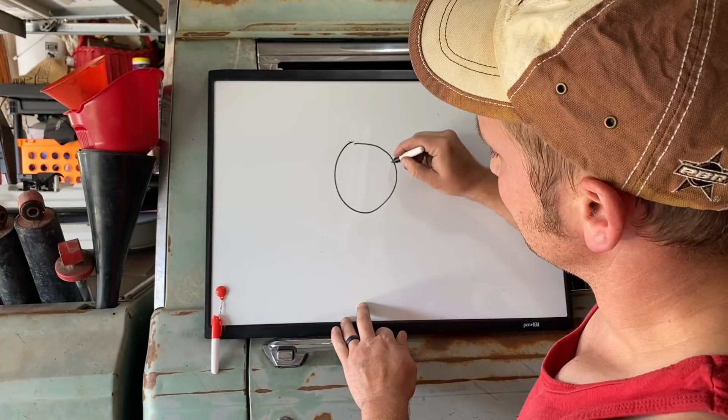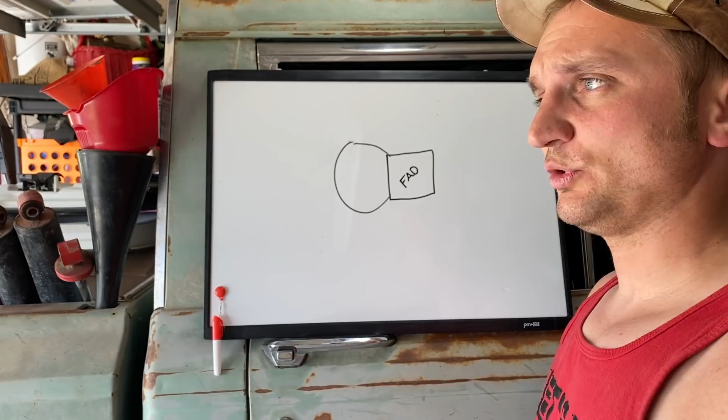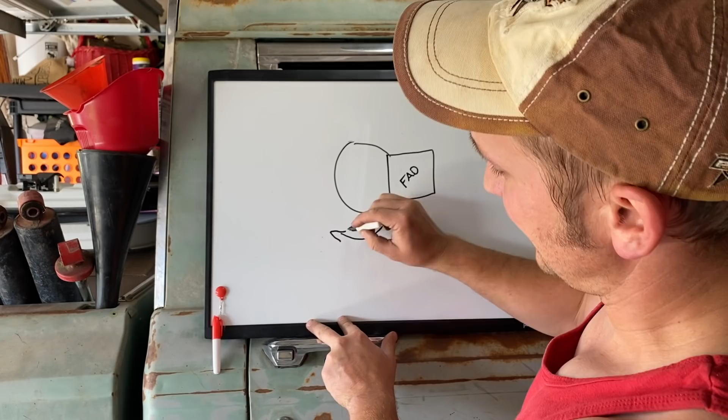Just to give you a visual representation of what I'm trying to articulate here: you have your axle tube, and you have the FAD motor coming off the side of the axle tube. As you lift the Jeep, a lot of people push their caster out to a higher degree to give a smoother ride. So when you add caster after lifting your Jeep, you're essentially rotating the bottom of the axle out forward, which leads to the top coming back.

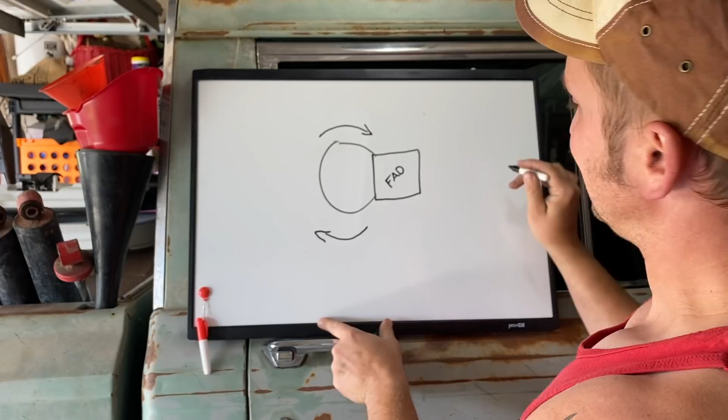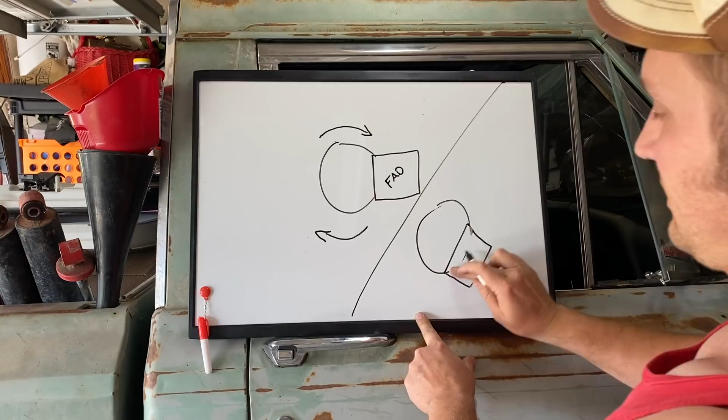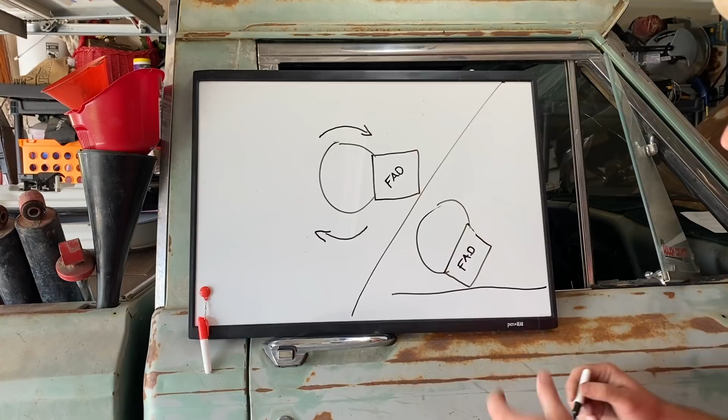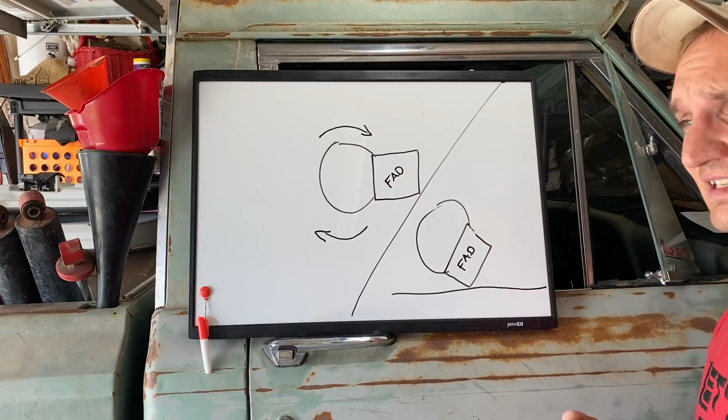So what that effectively does - you have your axle tube, and as you rotate it, your motor is going to start coming off the back. And of course, that's going to become a new low point on your axle, or maybe not your new low point, but another low point to be getting hit on rocks. Since this isn't designed to take hits on rocks, one, it's going to get you hung up. Two, if it cracks, you're going to start leaking oil. You don't want to lose oil in your front diff - that can be extremely problematic, operating a differential without oil.

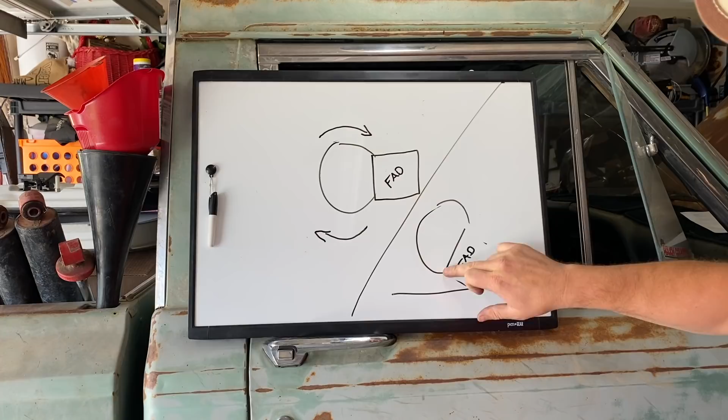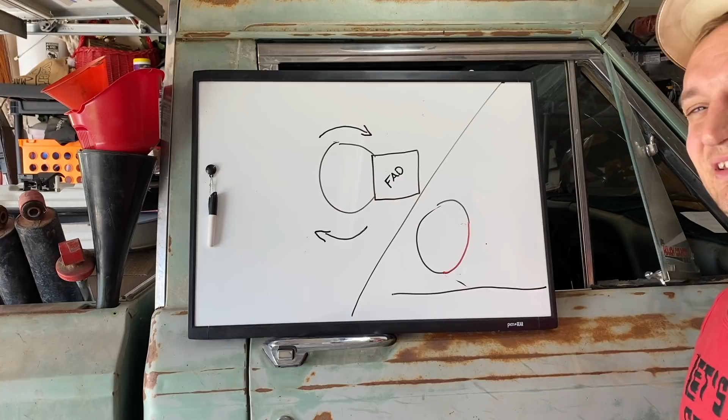So one of the purposes of this is, since I'll be deleting the FAD, not only will I be losing that low point, it also makes a couple bolts easier to get to underneath. Do you need to do this? No, of course not. Your Jeep's going to operate just fine with the FAD motor. But if you go to a solid axle up front, there's no point of having it.

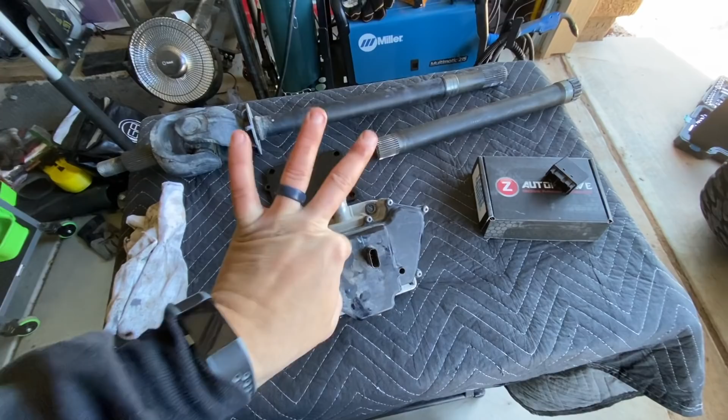We're about to get into all the install and all the different parts in order to do this delete. Stay tuned. All right, so deleting the FAD actually takes 3 different steps in order to fully delete. I've already done 2. This is finally going to be the last step in deleting the FAD.

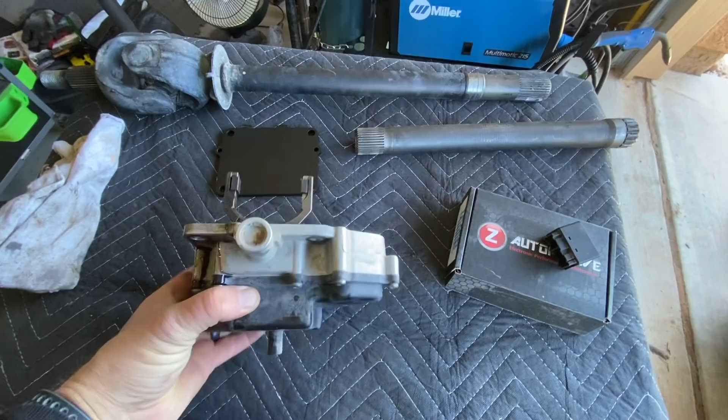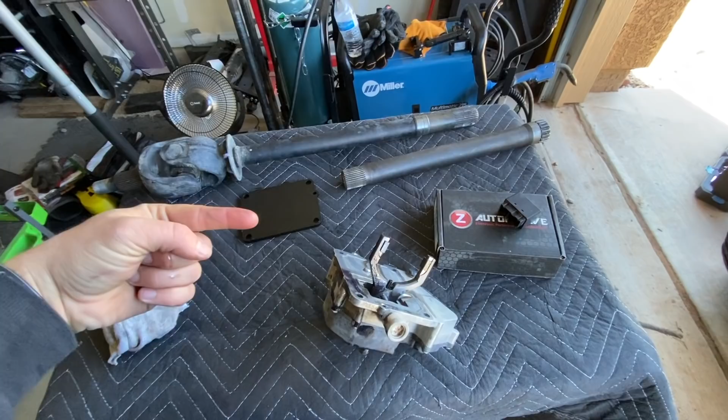Now, the FAD is what they call a front axle disconnect. It's this little actuator motor that attaches to your front axle on the passenger side. The idea of the FAD is to disengage the front axle, so when you're rolling down the road, the front axle and diff aren't also rotating, which prolongs the life of your front axle because it will not rotate while it's driving.

I apologize for the background noise. Neighbor is pouring concrete today.

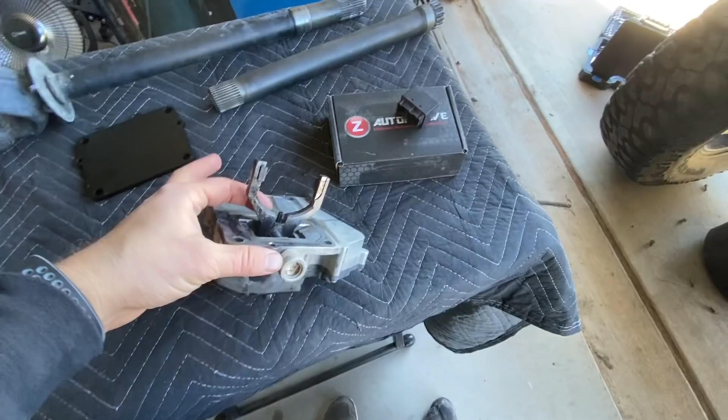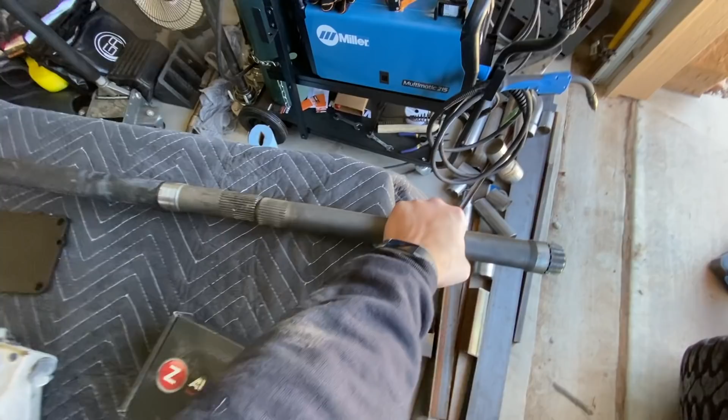How it works is this motor has a ring around it - sorry, I've lost the ring, a really big thick washer that fits around this. This will rotate left and right to engage and disengage your axle. This is actually my old axle, and it would look like this. It was a total of 2 pieces just for the passenger side. The FAD would sit directly in the middle where these 2 pieces combined, and it would slide - that fork would slide over and slide the coupler. It was just a very large ring around both, and it would connect and function as one piece, rotating together.

When you took it out of 4 and went back into 2 high, it would disengage and you wouldn't be spinning the front axle. The reason they do this is it saves a little in gas mileage, and it's cheaper for them to mass produce, I'm sure. Personally, I would have loved to see Jeep put locking hubs on the Rubicon models, because that would have been badass, and I wouldn't have had to do any of this. This is much cheaper for them to do, and of course it's all automatic - locking hubs you have to jump out and turn on and off, and Jeep was really just pushing to dummy-proof this Jeep as much as possible.

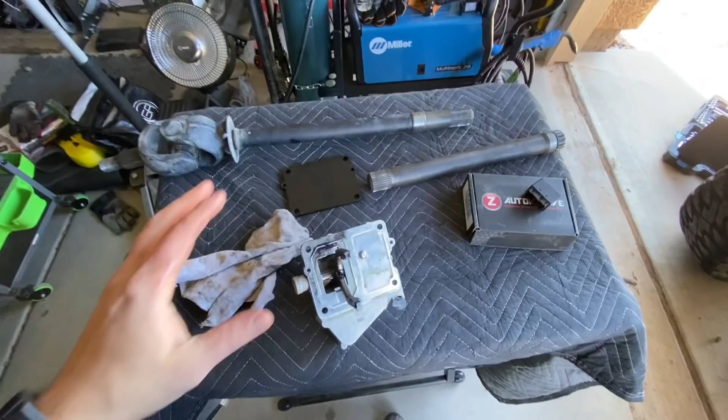So getting back into all the different steps you're going to need for a FAD delete: one, you're going to have to replace your 2-piece axle with a solid 1-piece. So the first step in doing the FAD delete is replacing the axle shaft. This is the most important part of doing it, because if you start deleting this and you still have a 2-piece axle in there, you're going to have issues.

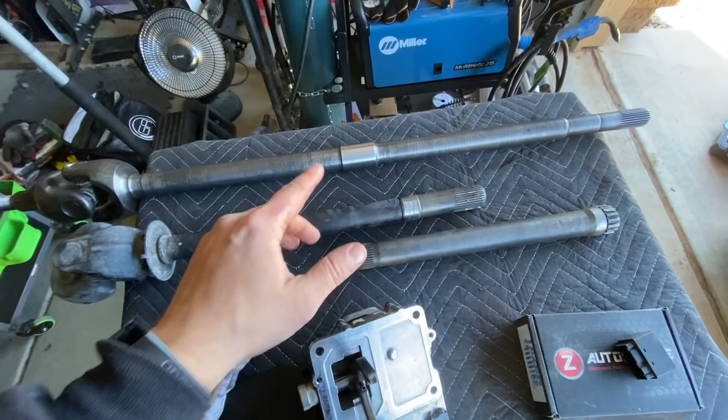Now, I've already replaced my axle with the RCVs, and I did that about a year ago. I'll put the link to that video here, so you can go back and watch how to do that. The second thing you're going to need - once you replace the axle shaft, this still works as normal. You won't have any issues, you won't have any dummy lights or anything. It will continue to function as if there is no problem. You'll be fine.

Now, if you remove this—I have read online, I have not personally seen it, but removing the FAD while the electrical system, which is what the Tazer is for, still thinks the FAD is there, you will have issues going into four-wheel drive.

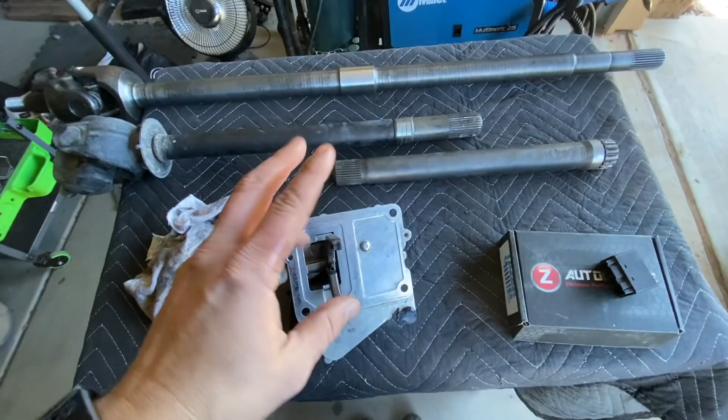Now, the second step is what you're going to need, is you're going to need the Tazer. What the Tazer will allow you to do is go into the settings and completely delete the electronic system for the FAD, and you won't have to worry about it. I'll put a link to that video here.

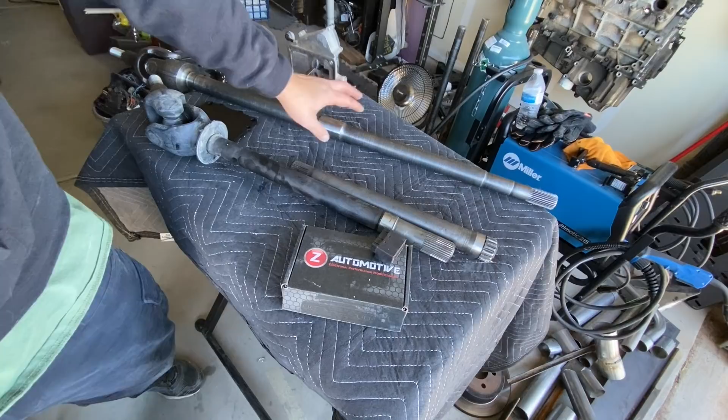The last thing you're going to need to do, once you deleted the electrical system and once you replace the axle shaft with a one piece, you can finally remove this guy. However, if you take this off by itself, you're going to have a giant hole in your front axle. You don't need that. So that's where this last piece comes in.

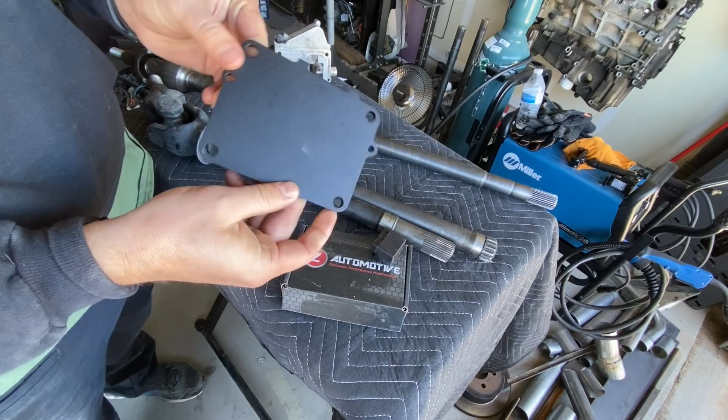Now, this is a delete plate. Nothing too fancy about it. I will be losing all this extra real estate off of the back of my axle. And of course, it sits a little lower, just kind of how my axle is positioned right now. So I got more caster, it starts to get rotated down that much more.

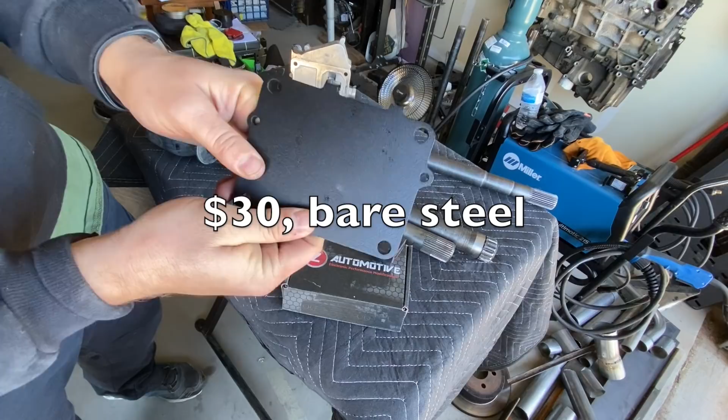So this piece I got from CADFAB, relatively cheap for what it is. Yes, you can make your own plate. Quite honestly, I didn't see the point of doing it because it's already been designed, cut, and ready to rock and roll. So removals are going to be pretty simple.

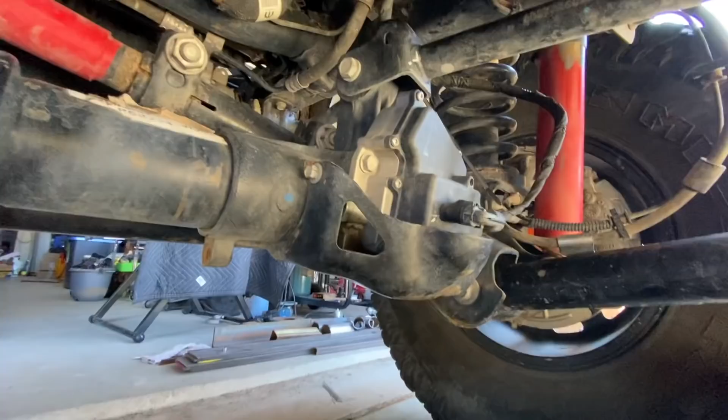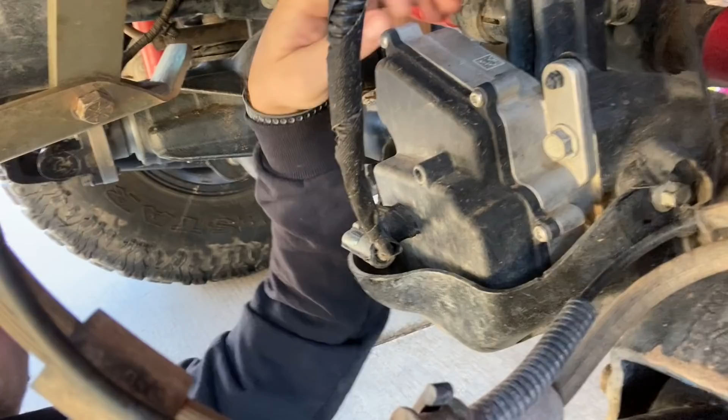First thing we're going to do is remove the skid plate, and then we'll be able to access the actual FAD actuator. To do that, you're going to need a 10 mil socket. There's going to be 1, 2, 3, and the fourth one is back here. For some reason I got tape on mine, but right there. You'll need a thin socket for this one.

Next step is going to be removing the plug. There's typically a white clip in here. I broke mine—I break my stuff a lot—but unplug it. Get that out of the way.

Then we're going to be removing this guy, this guy, this guy, this guy. Just at this point, be prepared to catch oil, because it is likely once you take off the actuator, you're going to get some oil leakage. Get yourself an oil pan to avoid making messes.

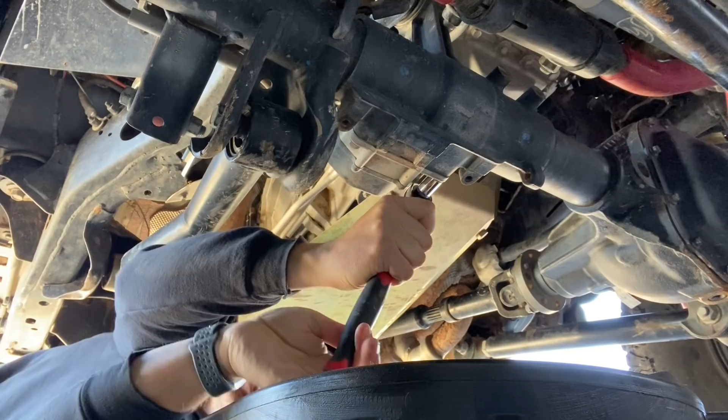Get yourself a 13—and is that a 13? I grabbed a 15. Weird. Does look like a 13. Yes. Whoop, see the oil leak? Yep. After removing those 4 bolts, it pulls right out.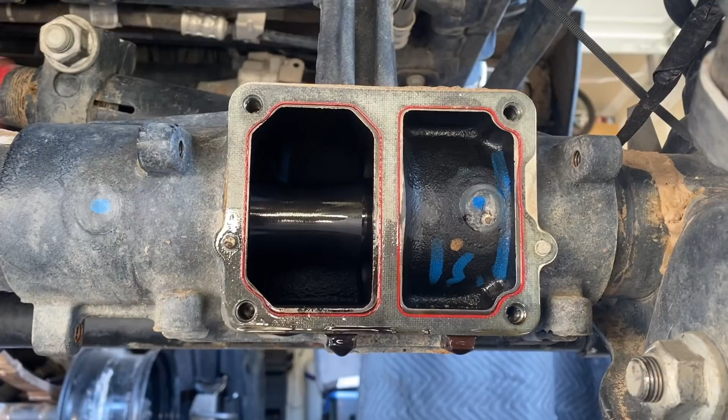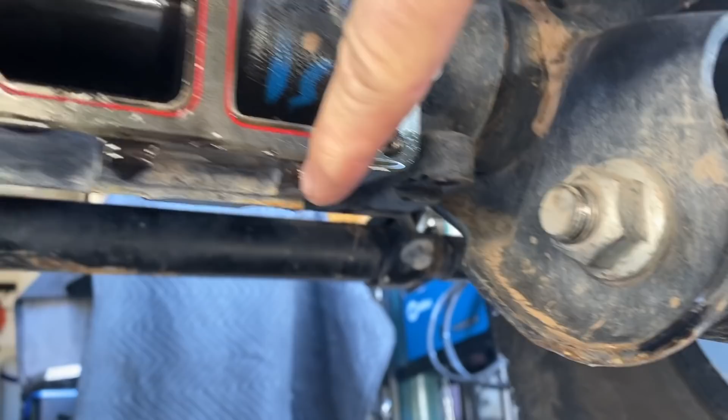After removing the FAD motor, you want to inspect those red gaskets going around the hole. Make sure they're in good condition, because that's basically what's going to stop your oil from leaking. On the sides, you have these little pins that help hold it in place, the 4 holes, and of course these guys that are protruding from the bottom. Everything kind of just matches up with the plate.

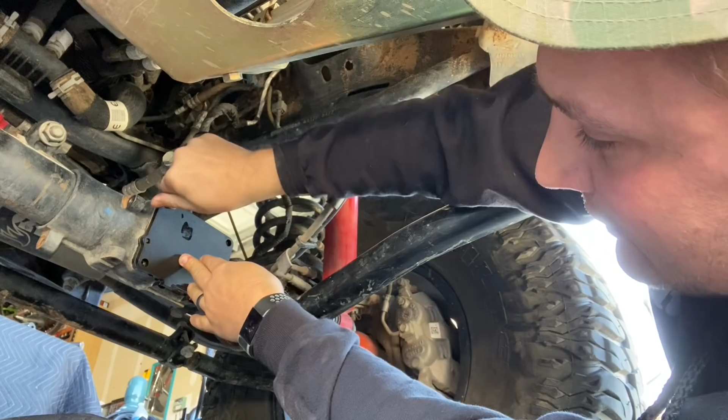That fits really nice. You're just going to be reusing your hardware—it's 4 bolts. Because we are doing a seal here, you're going to want to tighten in a crisscross pattern. Good habits.

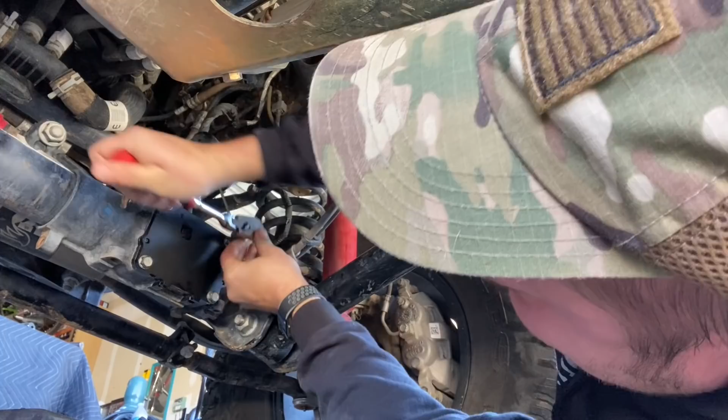If your gaskets are in bad shape, just use RTV to make your own gasket. After getting it bolted in, get your excess oil cleaned up and inspect for leaks. And sometimes the best way of doing that is just letting it sit for a couple minutes. But it looks all good.

So we've gained the clearance from the FAD motor. Again, you add caster to your JL, it starts pushing the lower half of your axle forward, which means the top is going to start rotating backwards, and this motor is going to start hanging lower and lower down, and it's going to be your low-hanging fruit.

And you hit it hard enough on rocks, you're going to crack it and you're going to lose oil. And you don't want to do that in your diff, because a diff running without sufficient amount of oil can be severely detrimental to your Jeep. So that's the main reason why I wanted to just go ahead and get rid of the FAD altogether. I have no purpose for it.

So again, very clean fitment. I got this plate from CADFAB. It does come bare steel. I got mine powder coated. Of course, you can just spray some engine paint on it and you'll be good to go. Link to the product in the description below.

We are finally all done with the whole FAD delete. It is my purpose to really show how robust you can make these Dana 44 axles and how much abuse we can actually push their way. Everything's going to be done in steps—that's just kind of how my budget will allow me to do it. This is a pretty straightforward delete, however, again, there is some extra steps to it.